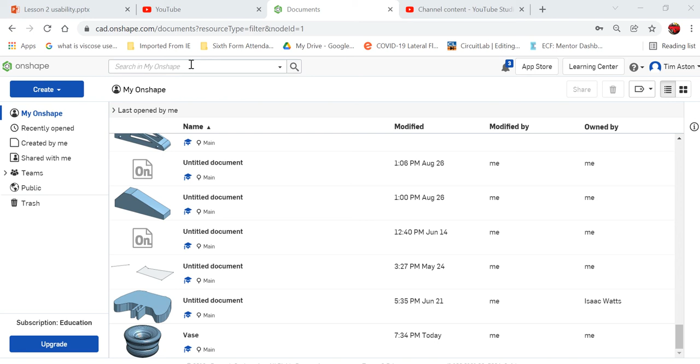So the first thing we want to do is go to create, and we're going to create a document. I'm going to call this vase 2, and I'm going to wait for it to load up and it will load my workspace. We're going to do our work on the top planes.

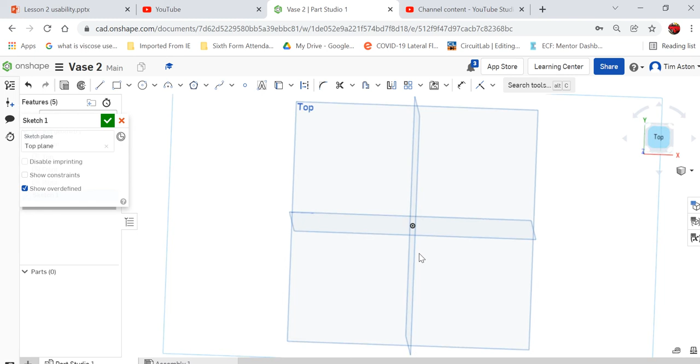The first thing I'm going to do is start a new sketch on my top plane, and I'm going to click on the top so it's two-dimensional and I've got a good base to start from. I'm going to start with a circle at the bottom, select my circle, left click to start it. Let's say this is going to be 30 mil and click OK. Come out of that there and go to the isometric view. So that is our first sketch.

We're going to create a series of sketches on new work planes that we're going to offset from that top plane. So I'm going to click away from there and right click on the top plane, go to offset plane, and it's going to let me offset one at 25 millimeters away from that plane. It's going to call it plane 1, which I'm happy with.

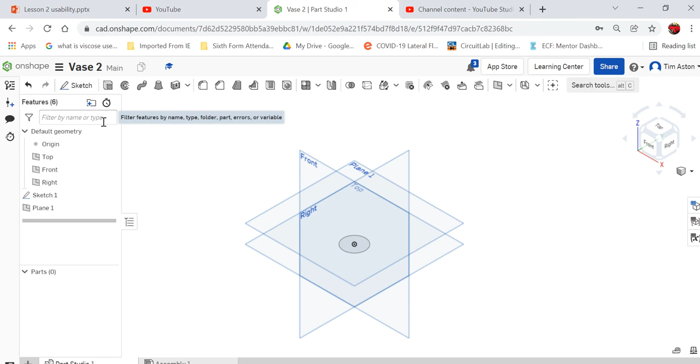So I'm going to click on that and create a sketch on plane 1, click top. And this time, instead of having a circle, I'm just going to put a polygon on there, left click, and I want it to be 12-sided. I'm going to finish the sketch, click on that, and go to isometric.

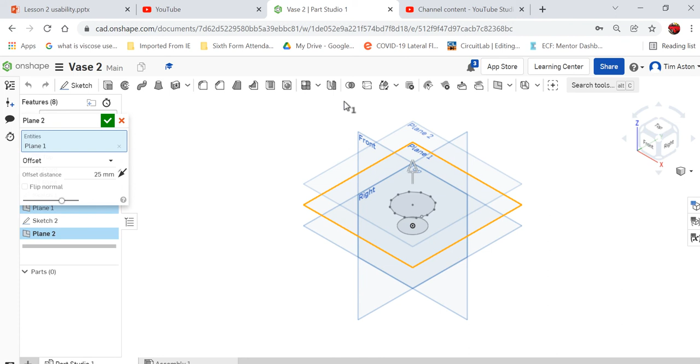And I want to then create another work plane, so right click on plane 1, and go to offset plane, and it's called plane 2. Again, you can play around with these sizes here. You could go for a thing that's 100 mil high and have 20 or 10 different planes offset 5 or 10 mil apart from each other to create a more complex looking shape.

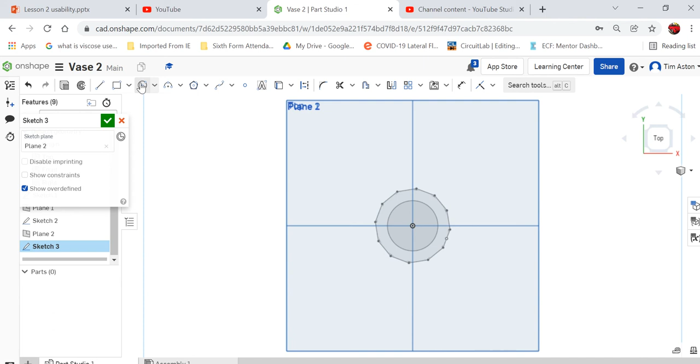I'm going to click OK and draw a new sketch on this plane here. At the top I'm going to do sketch 3 and look at that on the top view. I'm going to go for another circle, offset that there and make it a little bit bigger. Click sketch 3, click on that, I'm happy with that.

Look at the isometric view and I'm going to have one more work plane there. So right click on plane 2, offset plane through 25 millimeters. I'm good with that.

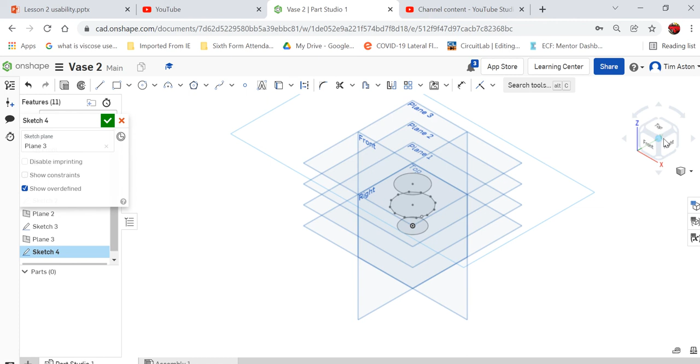And I'm going to draw another sketch on plane 3. Look at it from the top. Do you know what I'm going to draw? I'm going to draw a square this time, like so, and I'm good with that. I'm going to confirm that sketch, go to isometric, and I've got my 4 sketches.

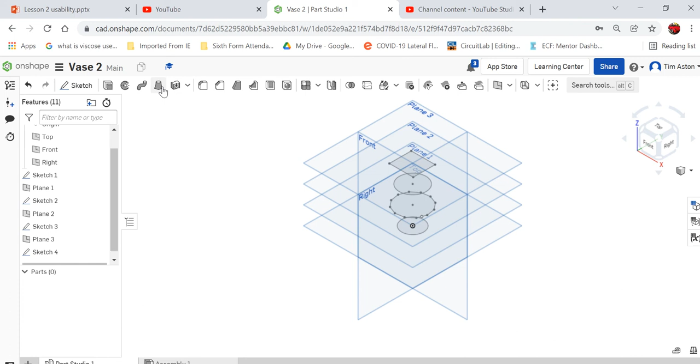I'll click away, I'm done with the sketch. Now we're going to use the loft tool to join these together. I'm going to click the loft tool just up here, select the bottom, then select this plate drawing there. The loft tool will bring these together like so, and it's joined those together nicely. It goes from the circle to the polygon to the circle to the square again, and joins it all together. I'm going to click to say I'm happy with it.

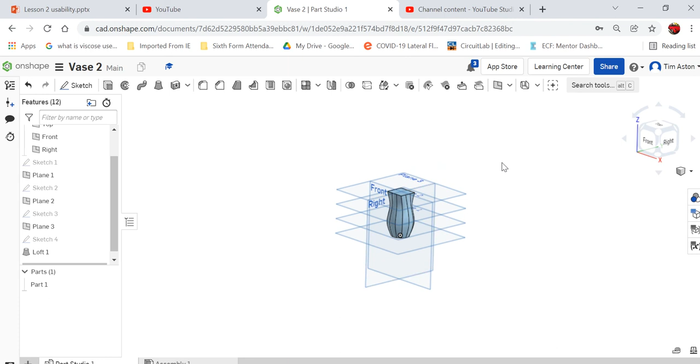Now there's 2 ways you could do this. If you just wanted this to be a hollow vase, you could click the shell tool, select that face there, and it's going to shell it by 2.5 mil around, and it will hollow it out like so. You could have it like that, or I'm going to cancel that.

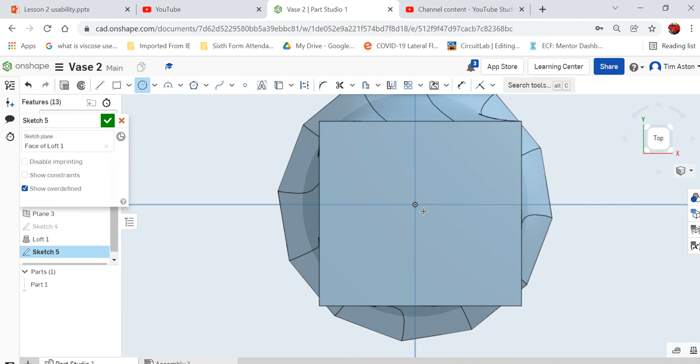Or if I want to create a new sketch on the top face there at the top, I'm going to draw a circle roughly in the middle of it now. Select that there. Now we want the diameter to be 16 because our test tube is 16, and click on the tick.

Isometric view, and I'm going to use the extrude tool now. Instead of adding material, select that as my sketch, go to remove, and it's automatically found a region for it to remove from. 25, let's go see what 60 mil looks like. We don't want to go all the way through because we don't want the test tube to fall out. And that looks like it'll go all the way through in there.

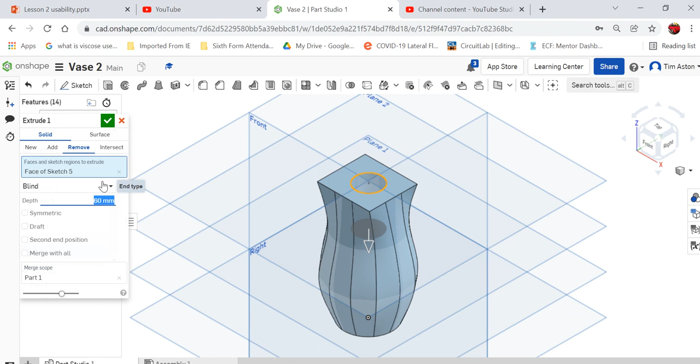Click the tick there. Just to tidy it up, you might want to play around with some of the fillet tools. I like the fillet tool, so you might want to fillet around the top edge, on the top here, and that's selected at 1. Let's have a look at what 2 would look like. Click the tick, and it's filleted all the way around there.

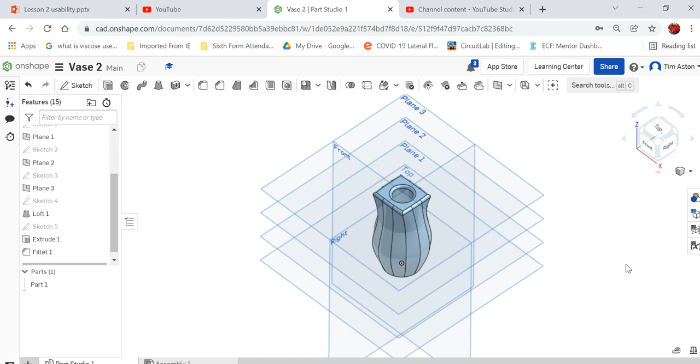You might want to 3D print this, so you can then right click on the Part Studio, export, and STL is your setting, fine, click OK, and we'll have a look at what it looks like in my slicing software. And that is what it would look like when it 3D prints. So have a go at that, good luck.

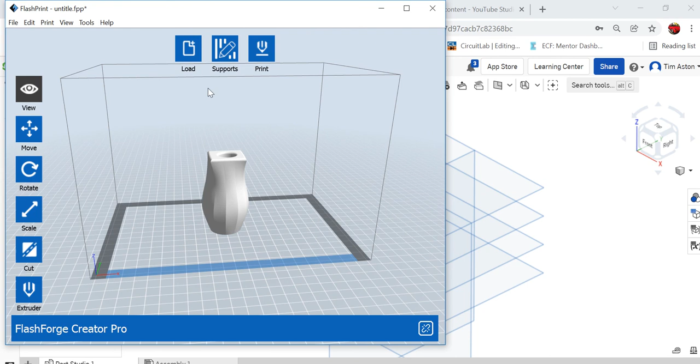What I'd recommend is to see how many layers you can build up, how many different work planes, and give that a go. Good luck.